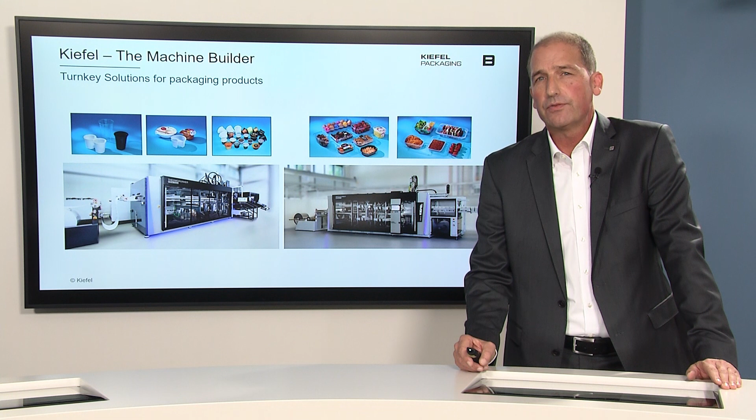Kiefel is a machine builder, but has developed into a complete company that can offer not only machines, but also tools and material development, product development. On the machine side, there are two sections we will touch today: the tray machines and the cup machines. Both have been developed into the .2 generation and are the state-of-the-art equipment that you can get in the market.

The Kiefel DNA, what does it exactly mean? We are on our way. Kiefel, when I started 16 years ago, built machines. In the meantime, as Kiefel Packaging, we can offer a complete system.

We have a site in the Netherlands, and Eric will give us an update from that side. And we also have one site in Austria where we do a lot of automation. Then we offer complete trainings. The ones that joined the Dialogue Days last year, it was fantastic to show also the apprenticeship system we installed at Kiefel. So it is the complete journey of the machine, of the life of the machine. From the day you buy the machine until you sell the machine, we can completely guide you and help you in all these stages.

Tray-to-tray recycling. Let's assume we have made trays, PET trays, on a Kiefel KMD Speedformer right now. And now the question is, we have a nice steak, we bought a nice tray with a steak, we grilled that steak of course on a Weber grill, and then I have the used tray. So I put it into the bin. What happens to this tray, Andreas? Can you please give us the information on what can be done with the tray? Please.

Now, these are the ecological advantages of recycling. So what does that mean for us as an industry, in the plastics industry as well as in the packaging industry, is very clear.

We really have to come together and close the loop in PET recycling. This is the final vision: one circle, which is bottle-to-bottle recycling, as well as a second circle of tray-to-tray recycling, have to be able to go into each other material-wise, input-wise, quality-wise.

In order to manage what bottle-to-bottle recycling is already doing, we need to look at trays and how we produce them, because attention needs to be put into how they are made. So what are the prerequisites for true recycling of a tray, or to create what we call an eco tray? It's actually four points.

We need to create recycling streams, first for transparent trays, then maybe for white trays, for example dairy packaging, and one for CPET. This is important because each of these have certain quality properties which would be diminished if mixed into each other.

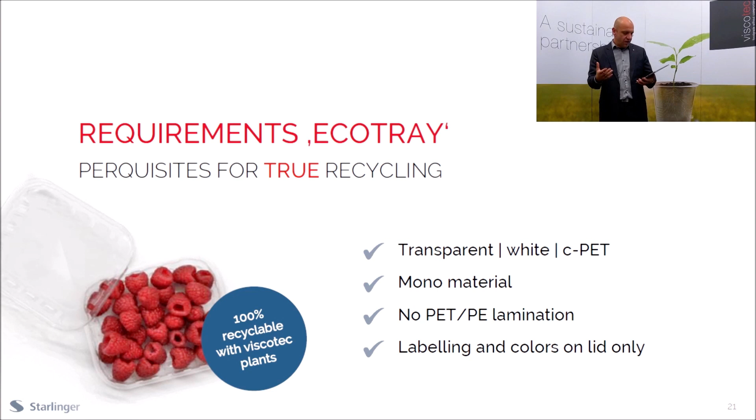So this is how the tray should look. Now I would like to show you machinery where input tray flake is made back into a sheet for thermoforming. How could that look like?

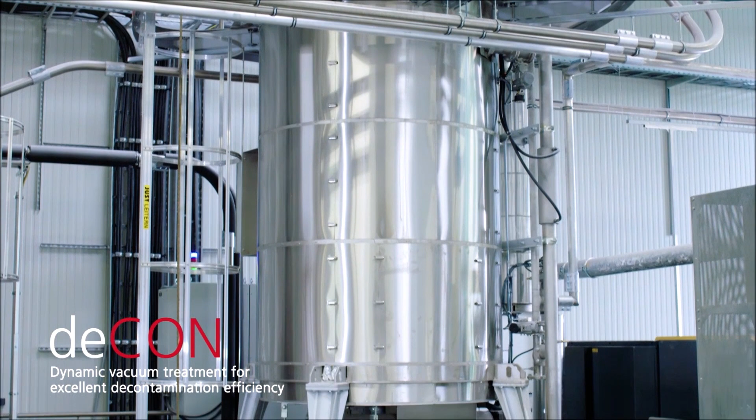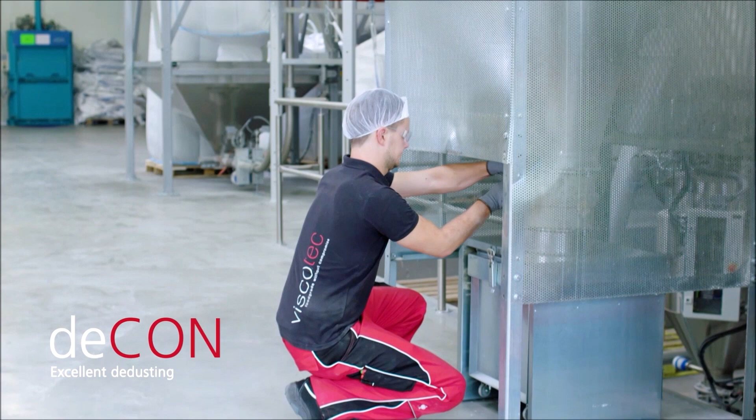In this first shot, you can see a decontamination dryer. Here the post-consumer recycled flake is transferred into 100% food grade flake in this super cleaning process. We're also extracting all the dust from the tray flakes, which is very important because dust has a huge impact on the sheet quality of the thermoforming sheet.

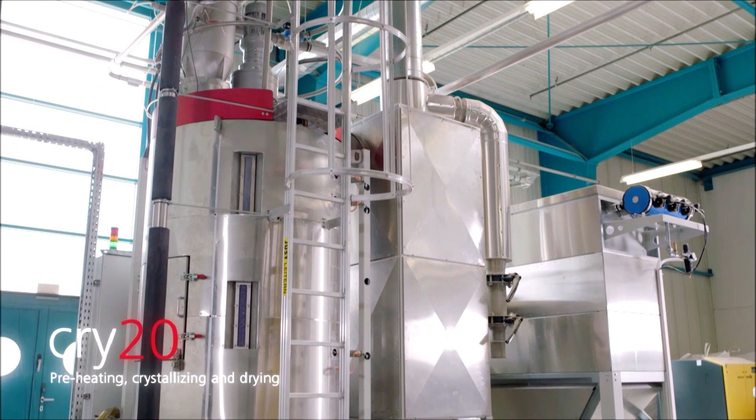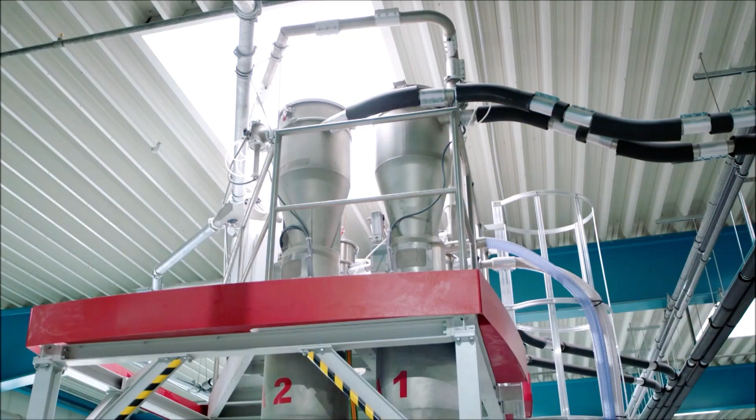Also, pre-drying of other input materials like in-house waste makes a lot of sense. This is why we created crystallizers, which again extract a big amount of the dust in these input materials to get a great sheet quality in the sheet line, as you can see in this shot. Here is the dosing system where the different input materials are received, mixed, and introduced directly into the extrusion step.

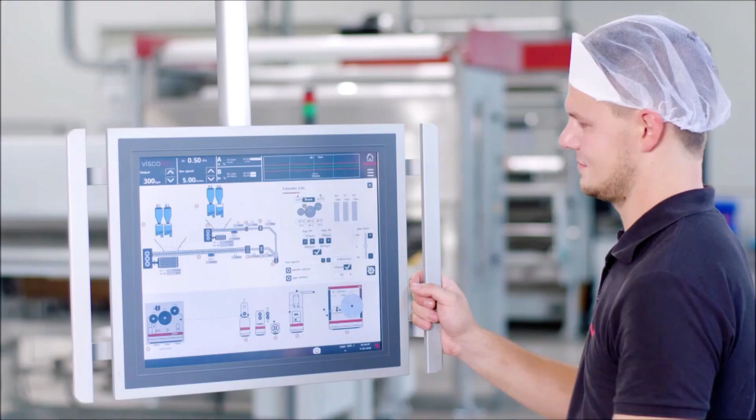This extrusion line has only one master control panel because we had in mind a very high grade of automatization, meaning a minimum requirement of numbers of operators. You can see everything is very intuitive and relatively straightforward.

What I also want to show you is this high grade of automatization—an automatic start. We have a counter here in the bottom right showing the minutes passing by as it takes for the operator to start the line completely by himself, from standstill to sheet.

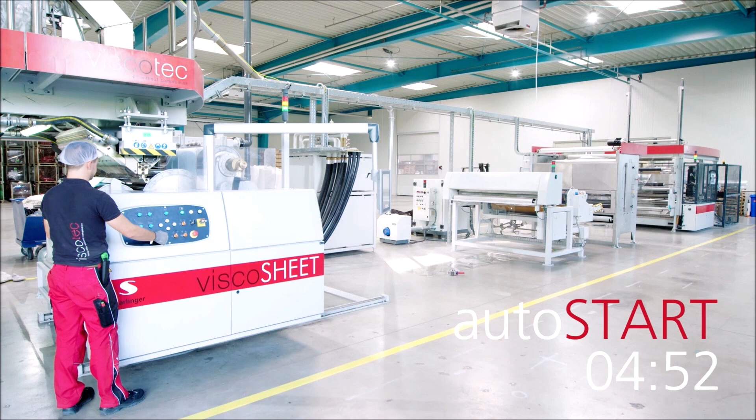You can see he's not moving around a lot at all. He's basically just pushing one button, and already by now he's fired up the extruder, the dosing system, the roll stack, and everything completely fully automatic by the push of just one button.

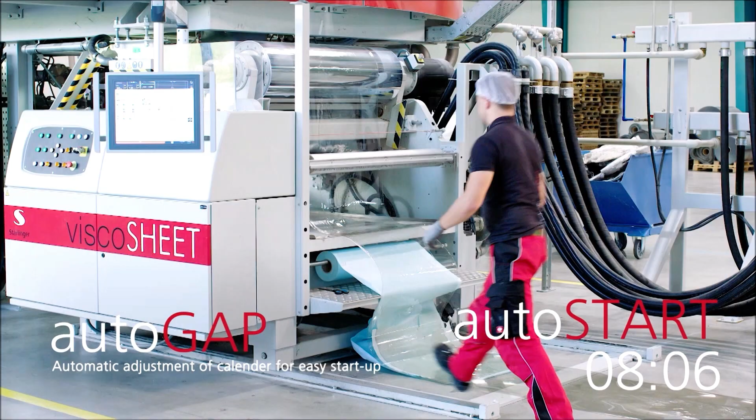He's now feeding the sheet into the rest of the downstream, and right now he's cutting the edge trim. That means we are adjusting the sheet to the desired width, and that was done after about 12 minutes into the process, and already the machine is running commercially viable sheet.

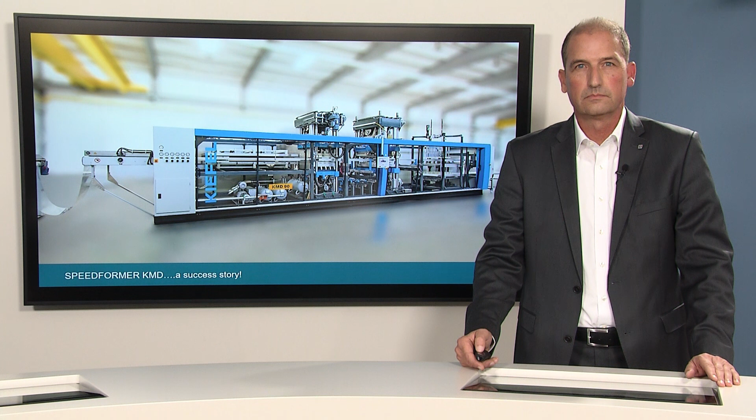Thank you, Andreas. I have to say, really nice equipment you make in Austria. And there is a lot of film coming from your Viscotec systems. So who can handle all that film? I know the answer, and you probably know the answer.

You can divide the market into two segments, one is food. There are a lot of applications, trays for meat, trays for vegetables, so all kinds of applications that are known, but also the non-food applications. In the meantime, thermoform products have become very difficult, very complex. So in certain areas we can compete with injection molding, and that makes a thermoforming machine even more reliable and attractive.

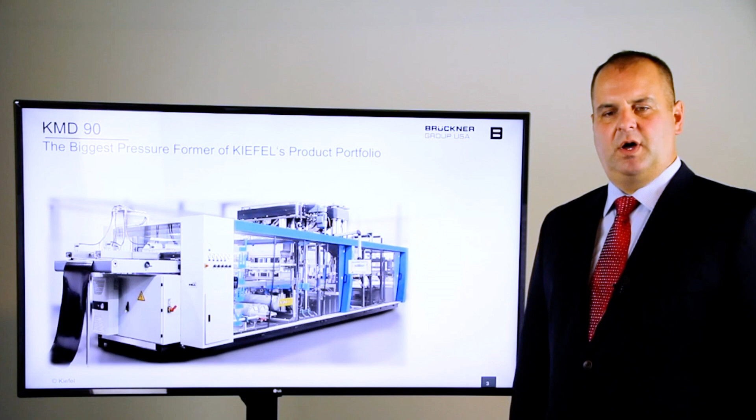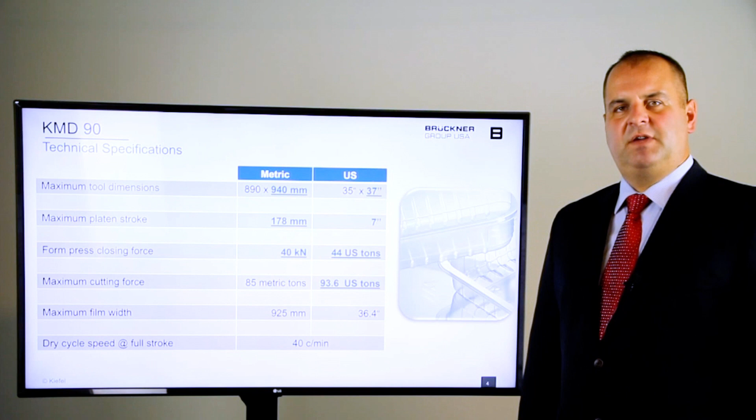KMD90 is the largest format machine Kiefel has designed, done after extensive market research in North America. The machine is able to fit most existing steel rule tools on the market. The KMD90 is the first machine designed with a longer index up to 37 inches to accommodate the local tooling technology. The way tool changes have been done over the last 50 years has been improved with this most recent design. Other changes to the Kiefel standards included longer platen strokes and higher tonnage for cutting. Pictured is a 3-station KMD90, which you will see a demonstration of later.

Distribution is key. Having the flexibility for a third motion plug on top as used in Europe and on the bottom as used in North America is a must to survive in the thermoforming world of the future. Process control is more possible with these new technologies. The most important aspect is to maintain a constant sheet temperature, and Kiefel does just that with a closed loop heat control. CAT, or Computer Aided Technology, is the software package of the future.

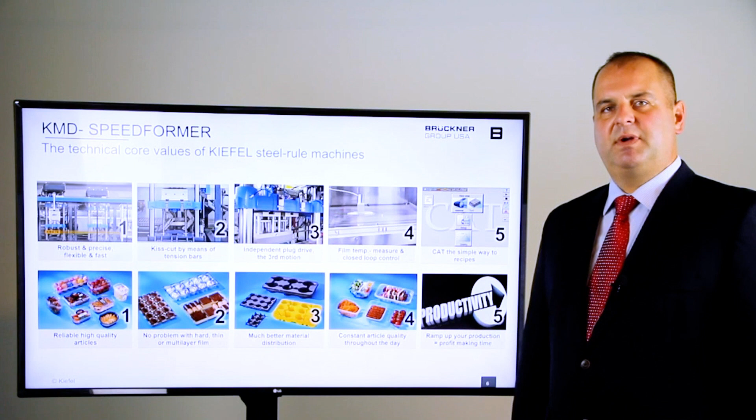Thermoforming experts of yesterday are retiring, and a new generation is taking over. This program makes it easy to develop and run tools and products. It also enables less experienced operators to seamlessly step in and run the KMD90.

Our forming station is the heart of the KMD90 machine. The KMD was designed with robust and full-size platens to limit deflections as well as a center servo-driven toggle system. The independent third motion drive available on both platens and independent clamp frame drive provides the highest flexibility in the thermoforming process. With a given clamping force, the forming process can be enhanced with pressure forming up to 72 psi.

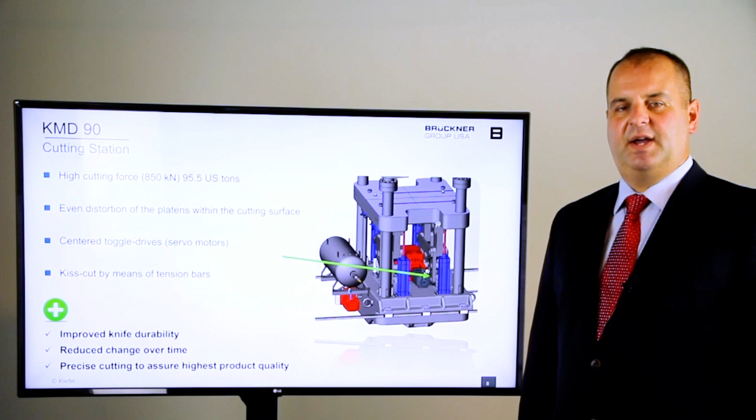Our most valuable selling point is the cutting station. We distinguish ourselves from the competition by offering a precise and robust cutting station. Controlling the cutting process using servo technology and our unique tension bar design extends the tooling lifetime and provides a repeatable process, which is critical.

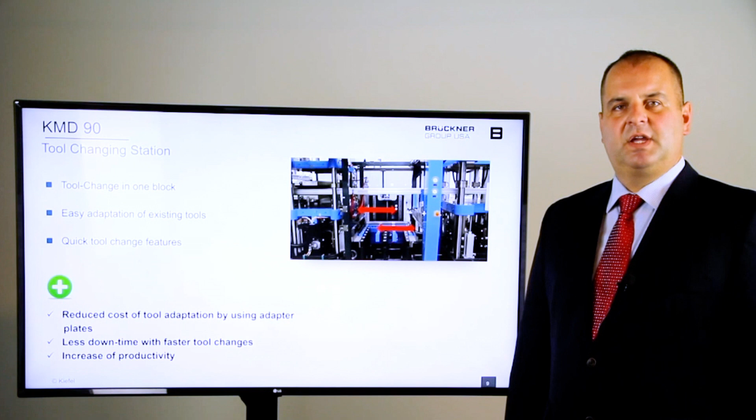Another unique design of our KMD90 is the tool change system. Loading the tools into the machine at an ergonomic level onto a lifting table makes the tool change look easy, together with incorporated tool change features to make the tool sliding, centering, and locking faster and more efficient. Convenience is another added value.

A lot of products produced on the KMD90 require hygienic and sterile conditions. This is where the KMD90 works well with many features, making it a very sterile machine. Clean servo technology is the foundation, but there are other additional features to prevent contamination and angel hair. We spent a lot of time researching angel hair elimination, and as a result have integrated features using heated cutting tools and our servo control to reduce this type of contamination.

Our customers have been able to reduce cycle time when converting tools to the KMD90 by 20 to 30%. The quick tool change feature means more available production capacity. The downstacking or pick and place options available on the KMD90 provide a counted stack of products at an ergonomic level, thus reducing packing labor.

Down gauging using the third motion plug assist can reduce the weight of the product and still maintain the mechanical properties. All of these points add value and make our customer more competitive in the global marketplace, which is our ultimate goal.

A PET meat tray will now be demonstrated on our KMD90 located here in Portsmouth, New Hampshire. Our adapted tooling performs at a 25% higher cycle rate. I will now turn it over to Fabio for the demonstration.

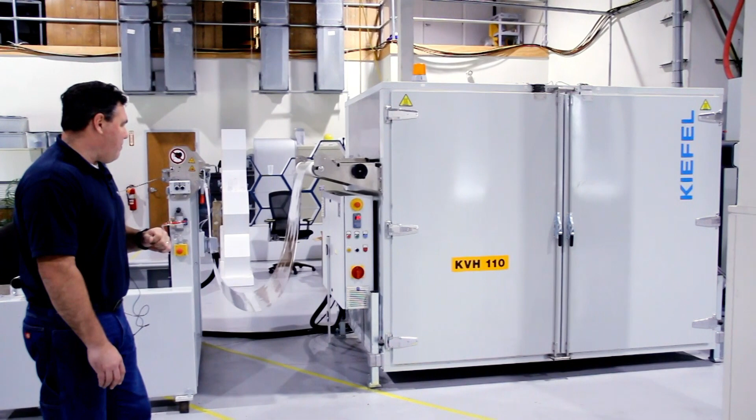The preheater is not being used for this demonstration. We are running APET. The preheater has temperature controls for standby and run mode.

From the preheater, the material progresses onto the in-feed table. The in-feed table has manual controls for width adjustment, as well as manual controls to feed the material in or pull it out of the machine.

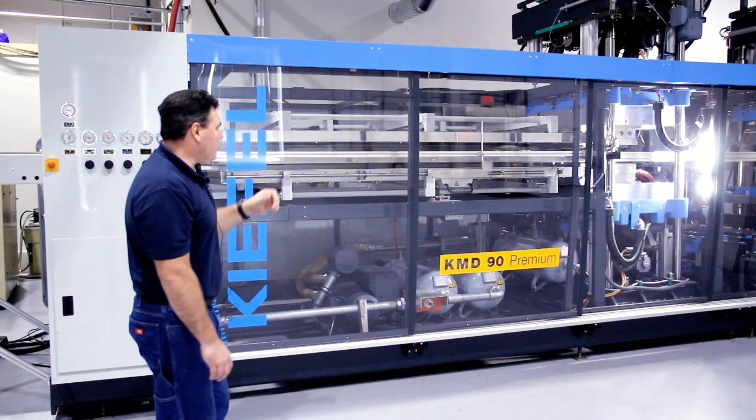From the in-feed table, the material progresses onto the chain rails. The chain rails are cooled in the oven section, and they contain automatic adjustment of the width of the material as it progresses to the stations. In the oven section, this oven is built with ceramic heaters. The lower oven contains screens for protecting those heaters from any plastic that may end up on them.

After the material is heated and spread, it progresses on to the forming station. On the KMD90 Premium, upper and lower stations are servo driven, with additional optional servos for upper and lower plug assist. In this case, we are not using the plug assist for this demonstration. Cooling for the tooling, vacuum and forming air come from the valve section of the machine.

The station after the forming station is our tool change station, for loading a tool onto the KMD90. The tool is placed on the tool loading station, and via a switch, the setup person can raise the tool and load it into the forming station or the punching station.

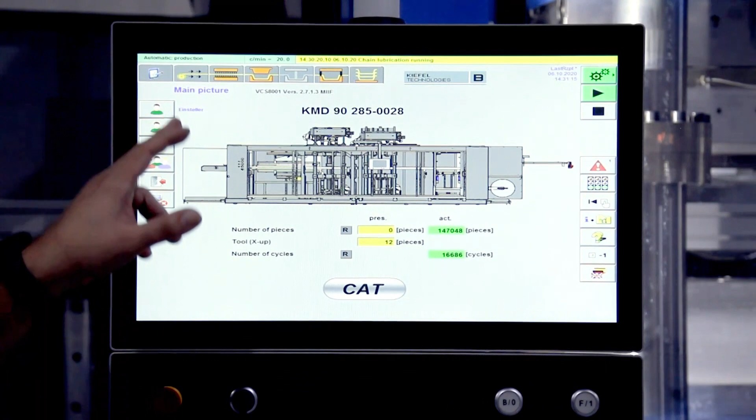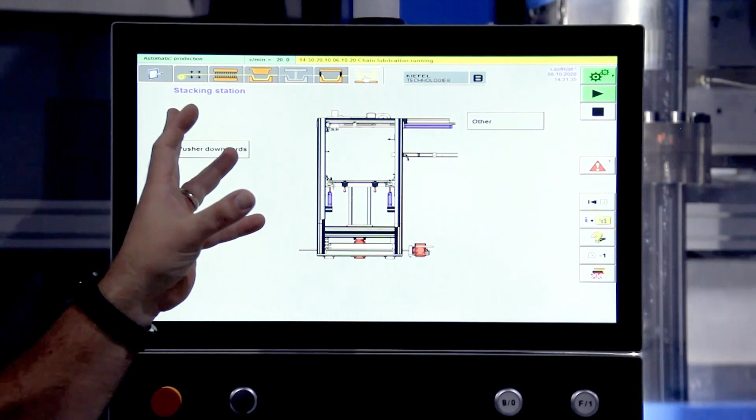The HMI on the KMD90 is a Siemens panel with a tab for each of the different stations. For example, the feeding or index system, oven controls, forming station, punching station, and stacking station. For each of the stations, you can easily access the manual function for the station by giving the button a second press.

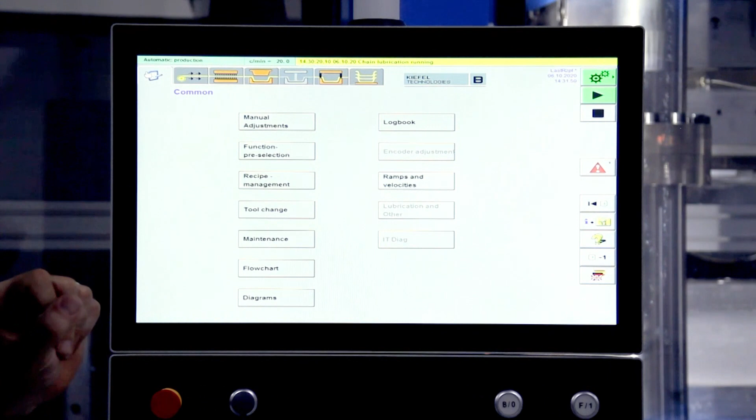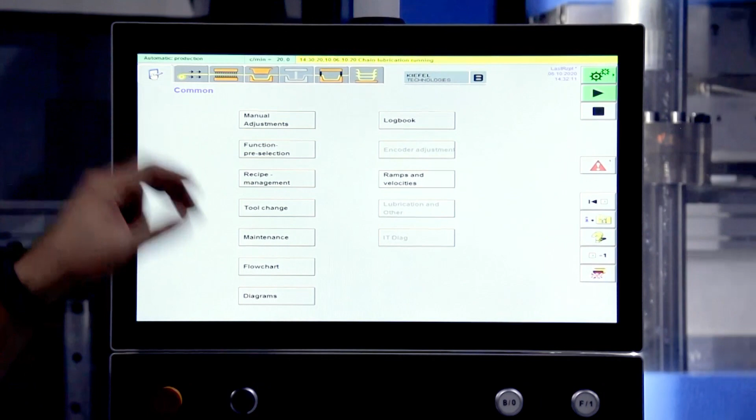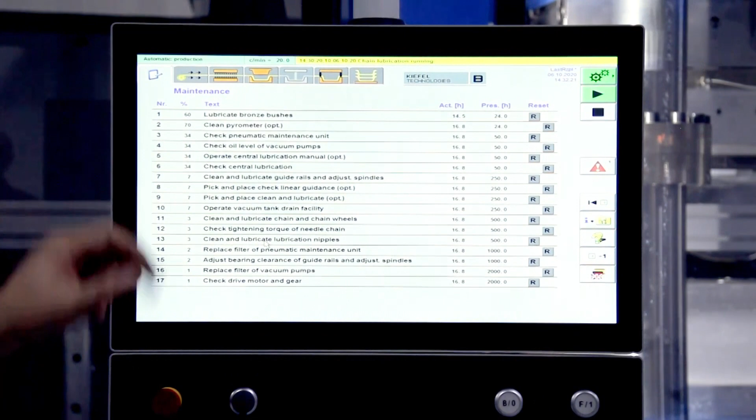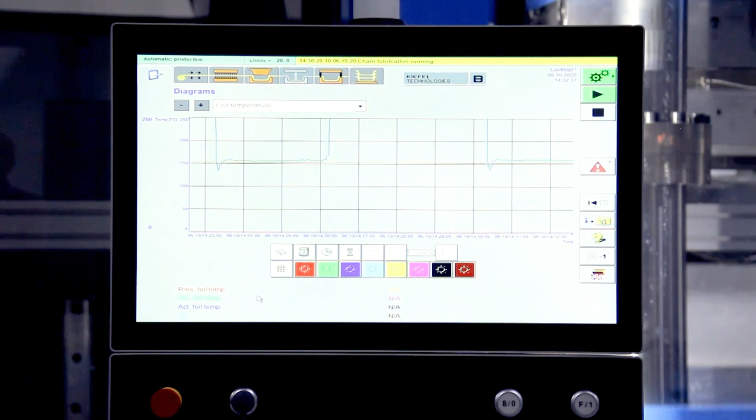In the common area of the HMI, we have function selections for the different functions in the recipe: recipe management, where you can select and load the different recipes, tool change sequence, maintenance sequence that alerts you when certain maintenance items come up on the machine and can be reset from this page, a process flowchart, as well as diagram for some critical information like sheet temperature, as well as other conditions or motor temperatures for all the different stations.

This screen also features computer-aided teaching, where you can select different materials and select different features of your tooling, and the machine prepares a recipe for you.

The punching station on the KMD90 is a precision adjusted station using tension rods on all corners of the station for precision parallel adjustment. The station is servo driven but air assisted for the weight of the tools. The station provides heating for the knives as well as fine adjustment for the cross direction adjustment, as well as turn direction of the knives, so they can be adjusted on the fly while the machine runs.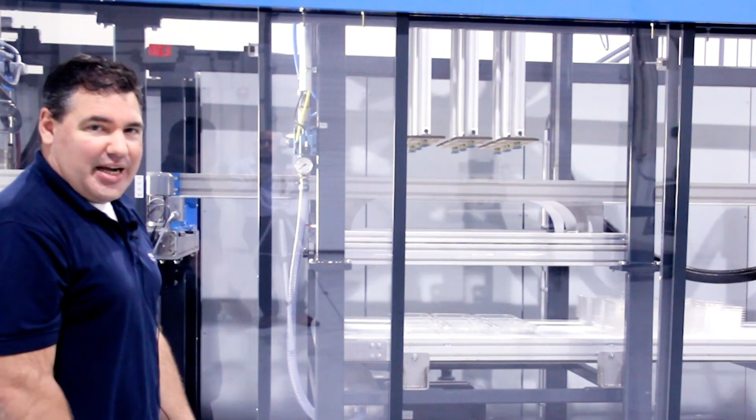The servo-driven stacking station is guided on the corners by linear bearings as well as direct driven by a rack and pinion system.

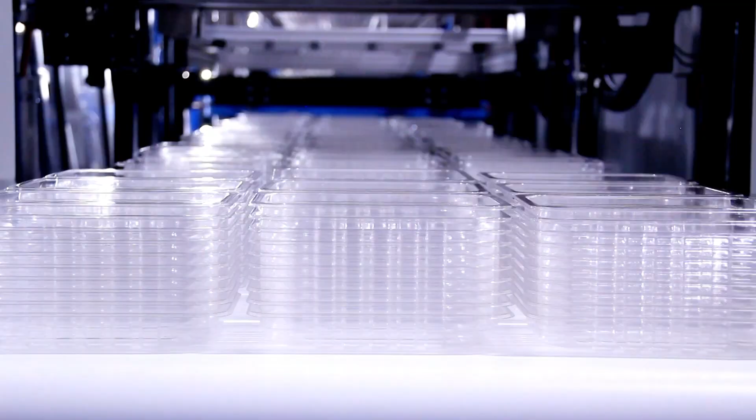Thank you, Justin and Fabio, for the great performance.

You could see the KMD90 speedformer running, making trays. Before we go into the cup world, we will make a sidestep and show you our site in the Netherlands, that is our technical center for material development and product development. And I would ask Eric to take over, please. Eric.

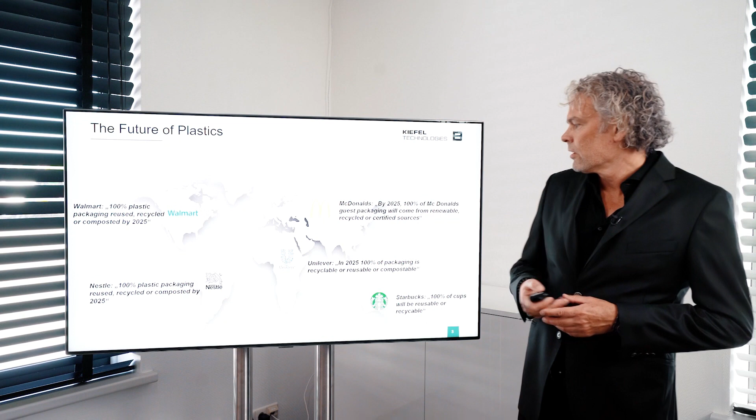Welcome to Kiefel Packaging Netherlands. We are the performance tool manufacturer and innovation center of Kiefel. Especially now that the demand for circular products is growing by the day, innovative solutions are the key to success. You only have to look at the biggest brand owners to see in what direction we're heading. For instance, McDonald's states that by 2025, 100% of their guest packaging will be renewable, recycled, or from certified sources. Unilever states that in 2025, 100% of packaging is recyclable, reusable, or compostable.

There are 3 tracks visible in the market with regards to optimizing materials. First track is based on polymers. Here you see that a lot of polymers are replaced by others which are more environmentally friendly. For instance, polyester is the material of choice for many products, and it's going to replace other materials which are currently used. The second track which is visible is bio-based material. For instance, a large hotel group is replacing their plastic cups by PLA cups. And the third one, which is quite new, is the fiber-based materials.

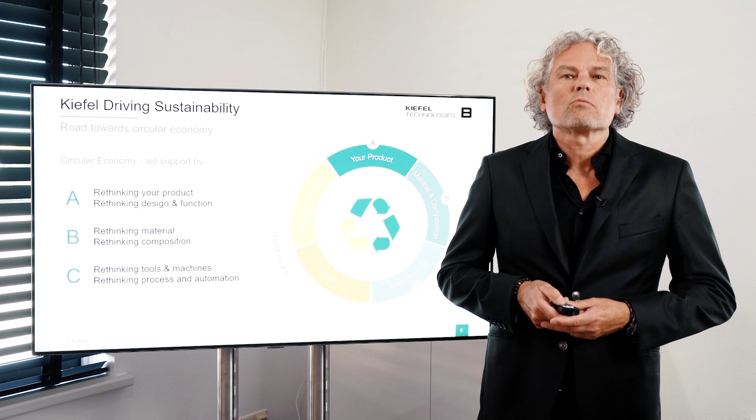At Kiefel, we meanwhile build up expertise to produce fiber-based products. But we also rethink composition with you. If you, for instance, have multiple layers in your packaging material, we can help you with making it into a monolayer material. But we will also focus on the impact on your machines and tools. If you, for instance, want to switch to bio-based materials, you need to adapt your process. The same goes if you want to use a high percentage of recycled materials, your process and machines will need to be adapted. In other words, together we can make your products recyclable, reusable or compostable, and we will support you in all the steps of the process.

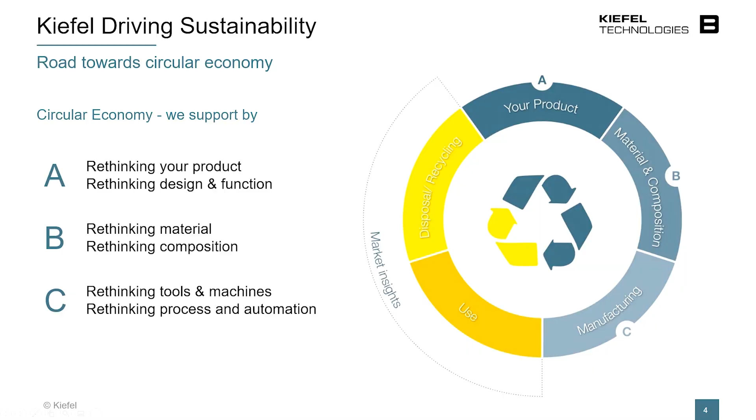In order to do so, we don't only have our tool manufacturing and thermoforming center, but also our laboratory, and this is where all the magic happens. Marius, would you be so kind to show us around? Of course, please follow me and I will show you around.

Welcome in our laboratory. Here we are working on new product development, working on process improvement and on troubleshooting. In the laboratory we have state-of-the-art equipment for this cause. We can analyze the material properties with our DSC and TGA. We can also analyze mechanical properties like the impact or the E-modulus. We can also measure barrier properties, for example oxygen or water vapor. We can also do computer simulations to check product properties. Besides those analyses, we have much more possibilities. But perhaps it would be better when I explain that based on a few examples. Take for example this yogurt bucket.

In the market there is at the moment an increasing pressure, especially from retailers, to downgrade the product weight, even up to 20%. That's not easy normally, but especially when you're already at your limits, it's even more difficult. Look at this cup - this is an injection molded bucket.

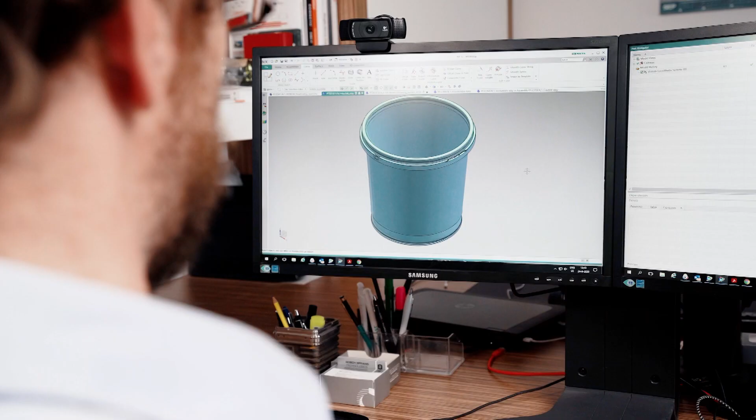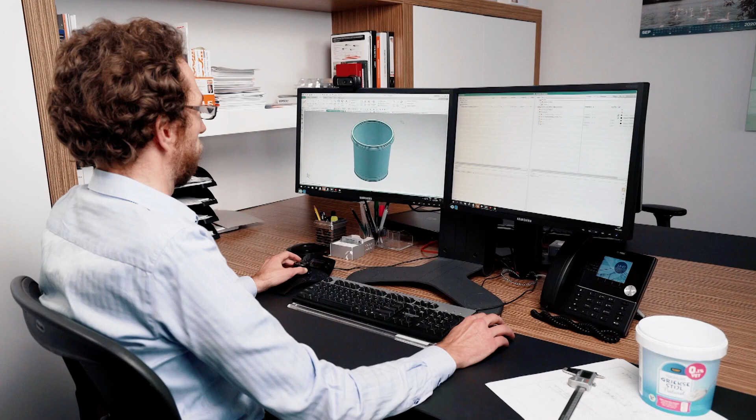We will investigate whether we can produce this product with thermoforming. How do we do that? First, we start with investigating the product features, the material and the product properties. We use reverse engineering to find out how we can make the cup with 20% less material. During this investigation, we check how the tool should look to create the specific product features, for example a certain lid fit or a tamper evident.

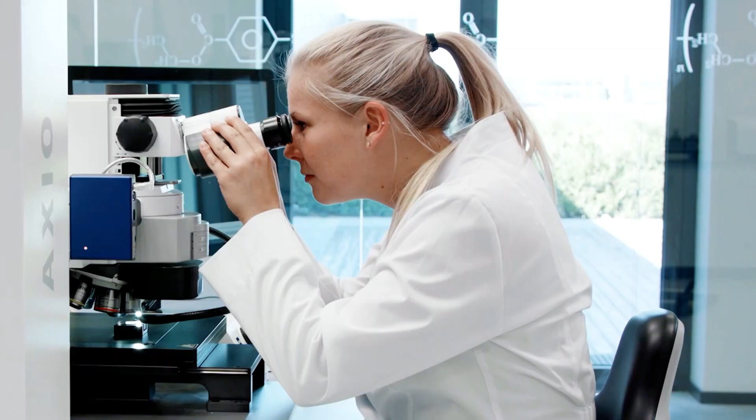As soon as we have the idea how to do it, we make a test tool which we run on our thermoforming test center. As soon as the products are ready, they are analyzed in the laboratory on material distribution, but also on the special features like the lid fit or the tamper evident. If the product is 100% to your satisfaction, we can start engineering and producing the production tool. When a production tool is delivered at your site, you get support from our service engineers to start up your production.

Another nice example is this CPET light cup from 100% recycled PET material. Because of the changing European legislation, there is more and more attention for using recycled material. However, you can imagine that using more recycled material has a huge influence on the process and the final product properties - and that is exactly where we want to support you as customer.

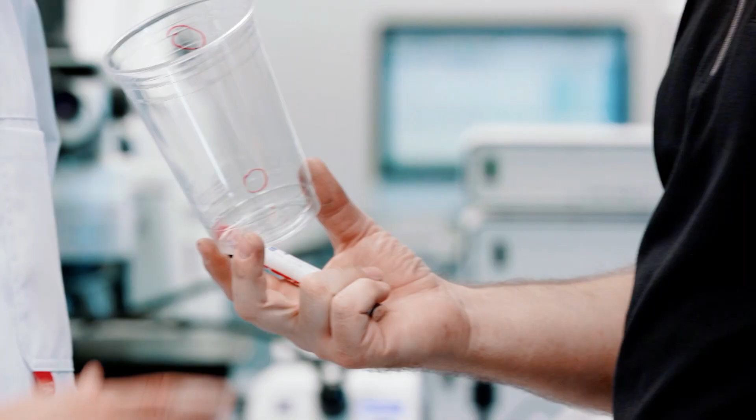Just as an example, we had a customer who had problems with the cutting behavior of his polypropylene capsule. We analyzed this material and found out that there was far too much polyethylene in the material. We solved this problem together with the material supplier by using another type of master batch.

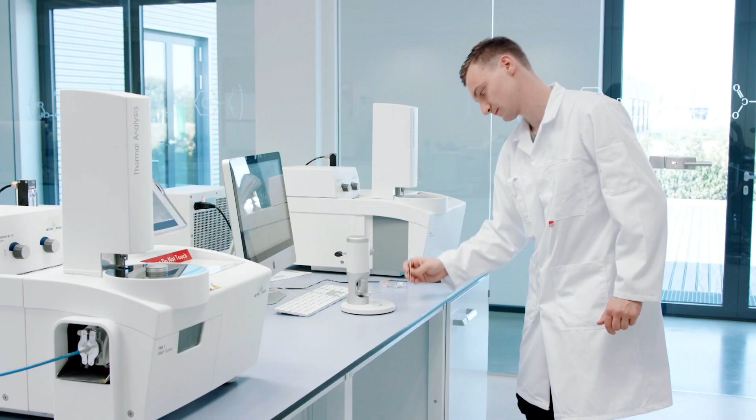But let's go back to the CPET light example. This is made from 100% recycled PET, and PET is the ideal material to realize the circular economy, because with the right pre-treatment, the PET can be used for food-safe applications again. This PET cup is produced in our thermoforming test center with 100% recycled PET material, which is prepared by Starlinger.

Because of the right tool development, material development and process development, this PET product is heat resistant up to 100 degrees, and therefore it can replace existing polystyrene products in the market. I show you this example to show that with the combination of these developments internally, together with collaboration through the value chain - in this case with Starlinger - we can find solutions for existing and new markets. So in other words, if you have to do something with recycled material, please let us know. We will be glad to help.

From 2021 onward, there will be a ban in the European Union on expanded polystyrene. Therefore, we get more and more questions from our customers for alternatives. Together with SML, an Austrian extrusion company, we developed two solutions. One of them is polypropylene foam - a safe alternative with no compromises on recyclability. Depending on the market where you are operating in, PET foam will be another solution.

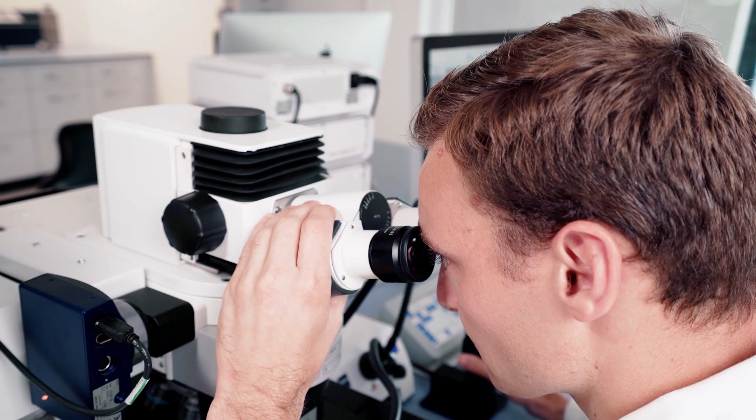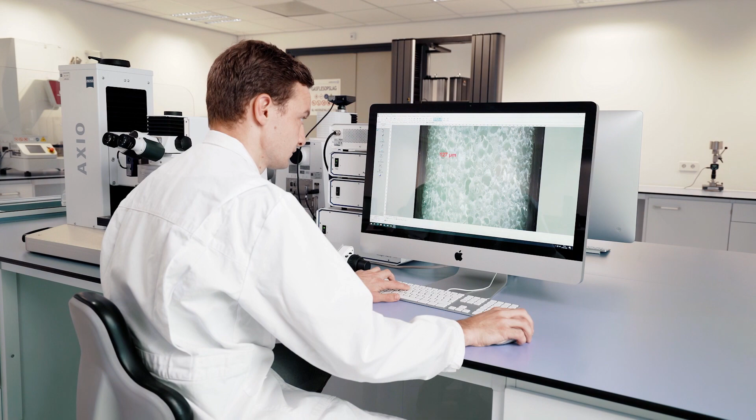Together with SML, we focused especially on the foam structure, because during the development project we found out that the foam structure has a huge influence on the thermoforming process, but also on the final product properties. Therefore, the foam structure is heavily investigated during this project.

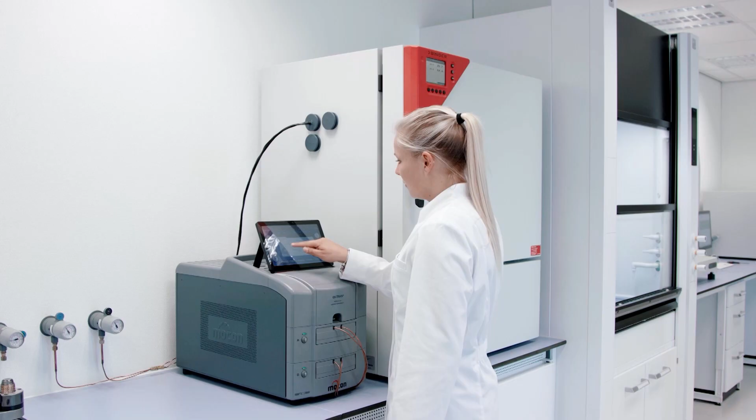Besides our efforts on recycled materials, we also have extensive experience with alternative materials, for example biomaterials, fibers or other types of paper. That can really be a solution when products are hard to collect or hard to recycle - for example this coffee capsule. We are developing this coffee capsule from a biomaterial. Besides the barrier, there are a lot of other challenges and challenging product features which have to be incorporated in this product, and therefore this is one of the ongoing and exciting product development projects we have.

Unfortunately, we could only give you a quick impression of our research facilities. There's a lot more to talk about, because every product has its specific challenges. If we can help to make your product better, lighter, stronger or more sustainable, if we can help to make your process more efficient, or if you need a thermoforming tool that fits all your needs, let us know and we will support you.

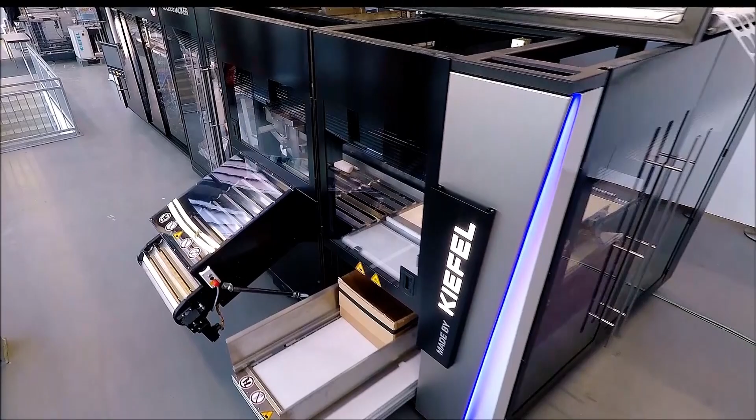Welcome back. So I hope you enjoyed the video of our KTR 5.2 speed.

Welcome back. I hope you enjoyed the video of our KTR 5.2 speed. Especially for you in the US, I heard from Justin that we have the American dream, our KMD 90. We also strive to make the KTR 6.1 a little more powerful and bigger, so we go for the KTR 6.2, our next generation in the 6 size. We want to be faster, stronger, and of course ensure you more output.

In our main drive, we also have a new system. We made a new design of the column discs and the main drive, now direct. All these improvements result in less maintenance, more power, and no bearing clearance. And we are listening to you.

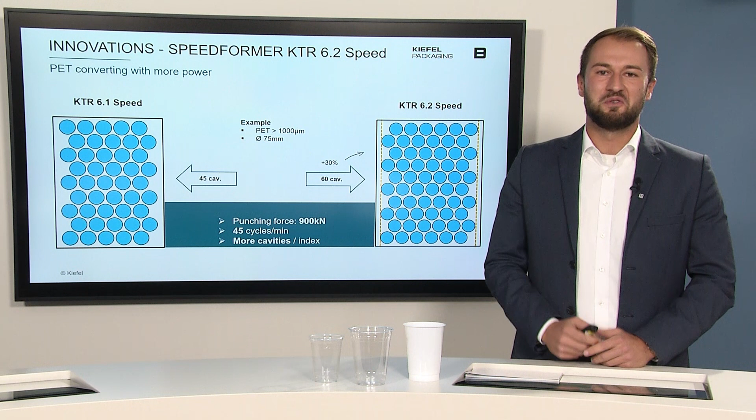Not only the main drive was improved, but also the forming area, as I mentioned before. On this slide you see the comparison between the KTR 6.1 and the KTR 6.2. For this example with a PET cup, we have 30% more cavities on the 6.2, which results in more output at the end of the day. I hope you will enjoy this machine as much as the 6.1, and we look forward to bringing it into your market.

From the forming station, I want to move to the heating station. Similar to our 0.2 generation of the KMD, we made improvements in the heating station of our KTR. Together with our supplier, we developed a new isolation and a new setup of the ceramic heaters. Our target was to bring more energy and more heating into the core of the foil, and into the foil in general, with less energy consumption.

This is also sustainable, and we tried to lower the machine costs, not including material. Here you can see a short breakdown concerning only the machine costs: investment costs, energy costs, labor costs, and tooling costs. About 30% are energy costs in your production cost, and we wanted to decrease this. With our new heating elements, we can set a new standard and bring these costs down by 10%. Together with our supplier, we made a big step into the future.

On the next slide, you can see the cooling. Cooling is also a main part of the process. Sometimes we can go faster, but the limitation is the cooling, because we need the cooling time for demolding, also for the perfect product quality.

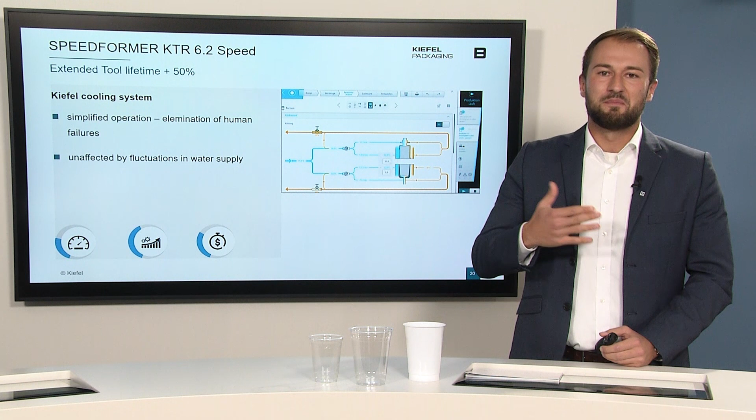So one other big step was the tool change. You know, it's not so easy if you go for a 6.1 or 6.2 machinery to change the tool. So we have now made a new yoke system where it's easier for parallel adjustment and to bring the tool in and out of the machine.

So now the space required for the operator is less than before, because now we have a remote control where the operator can handle everything from the front of the machine. You don't have to go to the operator side to the panel. So all the necessary things regarding the remote, the tool, or also tool changing arms are now in the front, so less space is required.

And of course, it's better for production. We want to save production time and bring you more output in the end. So this is one thing we tried to speed up, and therefore we are now faster. We can now handle a tool change in under 60 minutes. So we save more or less 30 minutes of the tool change, and also 100 hours of production time a year. This improvement is regarding our new yoke system, and thank you to our engineering that we can offer you this solution now.

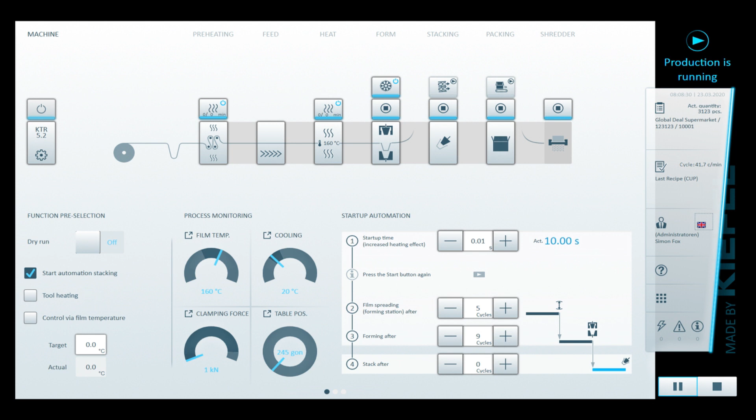And then we can see how we stack the cups. So there's also included the stacking of the cups, and later on, after we stack these cups, we bring it to the carton box. And the last button is the shredder.

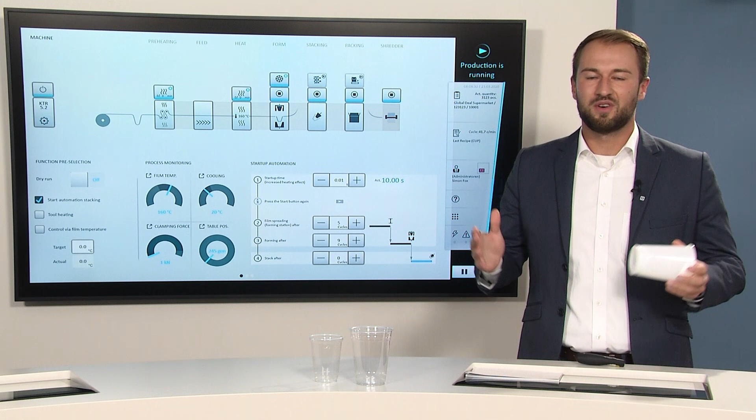As Thomas and the guys mentioned before, we are a turnkey partner. And therefore, we of course try to bring all our components into our HMI so that one operator can handle all these things from one HMI, one panel, and doesn't have to go to the different units.

So further on, I want to go with you into the automatization world. Here you can see our KTR 5.2, which was launched in 2019 at the K-Show. Our automatization is invented and improved in Kiefel Packaging Austria. So our subsidiary in Austria is the expert for automatization.

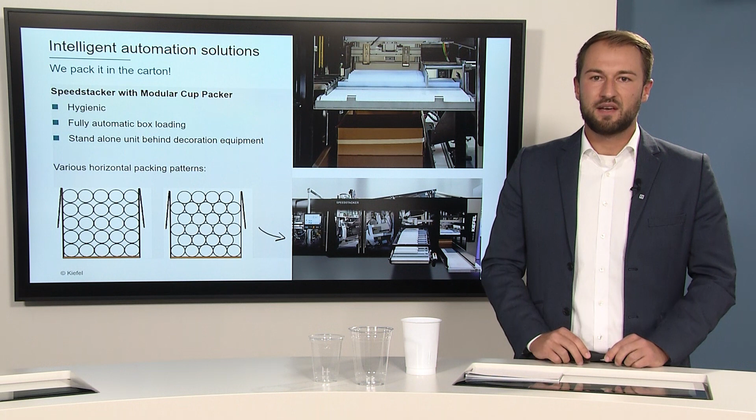And what do we have in our automation? Here you can see the speed stacker combined with the MCP, so-called modular cup packer. The speed stacker, formerly known as pickup stacker, is how we stack the cups. We stack the cups into our basket, and after we stack our cups, we want to bring it to the carton box. So this is a solution where it's all in one unit together.

Also, we have a standalone possibility. So if you want the MCP after a decoration or printing unit, it's also possible to bring the MCP to this unit. So we have different styles how we try to serve you and what is your demand.

In general, I want to say, with these circumstances with COVID-19, it's important to think about automatization, because it's hygienic, nobody touches your cups, your products. And to make it a little bit clearer, I want to show you a video later on.

First I want to mention this is for the horizontal packing patterns, horizontal and not vertical. So in the video you will see the horizontal packing patterns. We have different, we can do different styles. Please get in touch with us if you have a special requirement. But first, let us see the video.

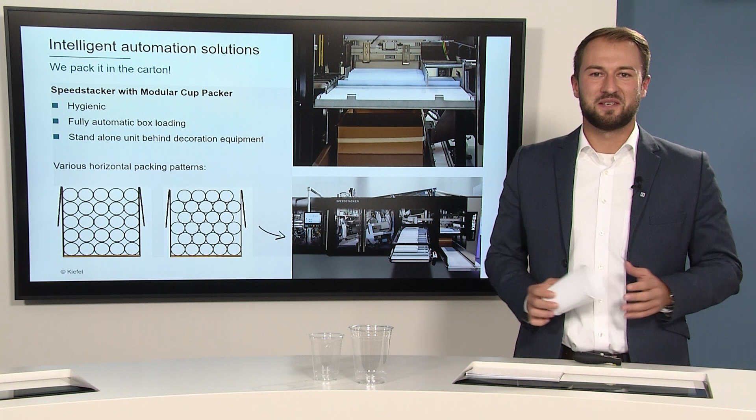Welcome back to me in the studio. So now you saw the horizontal packing patterns, the MCP. This MCP shown to you is regarding decoration or printing units. You saw Moritz infeeding the machine, and after the MCP it comes to the carton box.

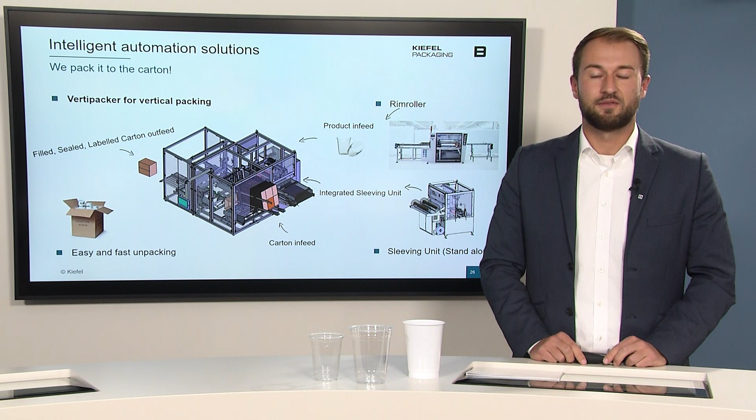So, horizontal packing. Now I want to go with you to the vertical packing. We have also invented a vertipacker. The vertipacker is especially for fast food restaurants, like McDonald's, Starbucks, however they call it, because the vertipacker has one big benefit.

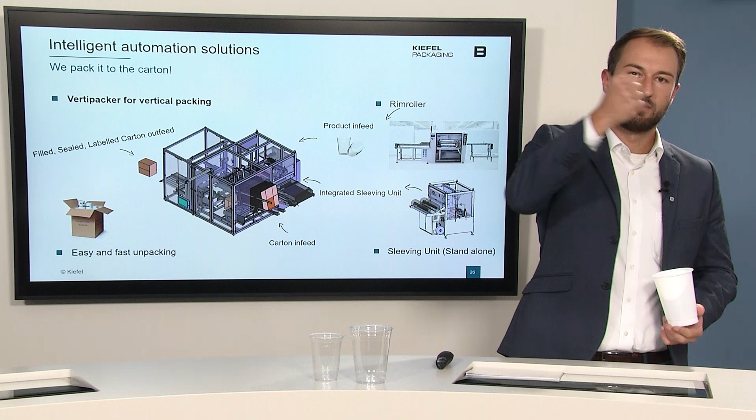The vertipacker is counting the sleeves. So first the product gets sleeved and then you bring it to the carton box, and the operator can take one sleeve out of the box, bring it to his desk, put it on the desk, the whole sleeve, cut the sleeve, and everything is in a row. So the vertipacker especially is in demand in fast food restaurants, and therefore we invented this new system.

Before I explain this unit, I want to come to the rim roller. You see the product infeed on the slide, and the rim roller is for drinking cups. So if you want a smooth feeling for your drinking cups, the rim has to be done by our rim roller. If you have a demand for this, we can of course serve you a rim roller, and please get in touch with us if there's a requirement or demand.

So now we have the product infeed on our slide, but also a carton box infeed. The carton box infeed is also used as a storage box. So we see carton box and product infeed. And in this total unit of the vertipacker, we have a sleeving unit included.

So we sleeve our stacks, our counted stacks, we sleeve it. After the sleeve, we bring it to the carton box. But this is not the end. After the carton box, we seal the carton box, we label the carton box, and if you want or if it's required, we also can palletize it. So this vertipacker has our best things in it and combines all requirements.

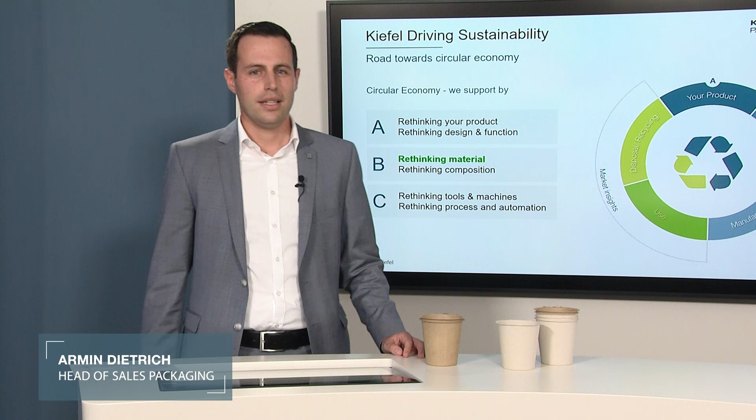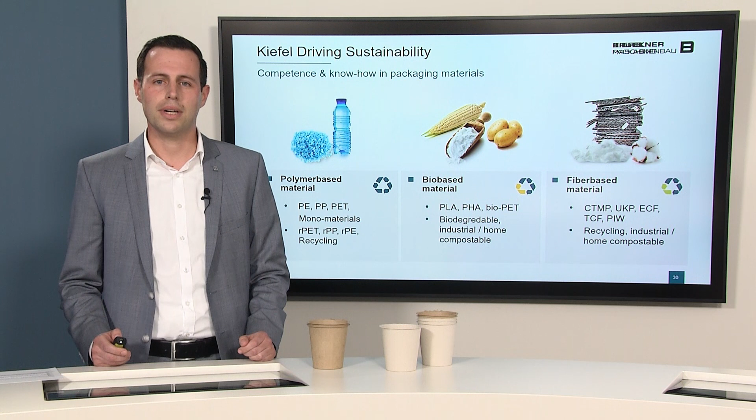You heard already a lot about the machine, the tooling, the automation, and how we are rethinking things. But I would like to dig a little bit more into the material side. As you know, Kiefel has been providing thermoforming machines for the polymer industries for many years. We also offer this for bio-based materials like PLA or PHA. But now I'd like to talk about our latest development, which took us 1.5 years to develop: thermoforming machines for the fiber industry.

But first, let's talk about what fiber is. Fiber is a cellulose material, made out of renewable paper, plants, sugarcane, or recycled waste paper. We have two different kinds of fiber. For food industry, we recommend you definitely use virgin fiber, since you have a high hygienic standard there, and it's necessary to use virgin material. But if you just produce transport material or packaging for other things, you can use post-industrial fiber as well, or sometimes make a mix of both with additives to suit your application.

Coming now to our machine, we've already sold it to Europe and the US. It's the KFT90 nature former. We have it available as a speed and a flex version, but that's way too much for today, so I'll just highlight the benefits.

We are using a robot there, and that's a really unique thing. It's very easy to maintain the tool because of the robot movements, and you can easily put the tools in and out - with the flex machine within 15 minutes, and with the speed machine making a tool change within 2 hours. So that's quite fast.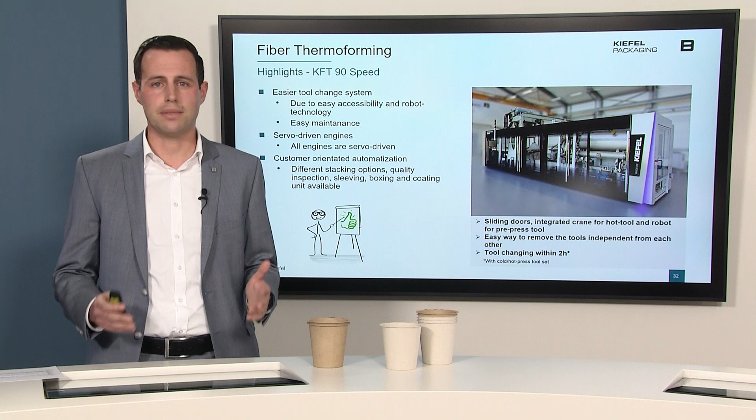On the other side, we are using all the know-how we have from the KMD world. This machine we've been selling for so many years, and 90% of the components are also used in the KFT machine, so it's a well-proven machine. There are all servo-driven engines inside, and the whole automation you have from the KMD world is also available in the KFT world - meaning packing, sleeving, stacking, everything you want, suiting your application.

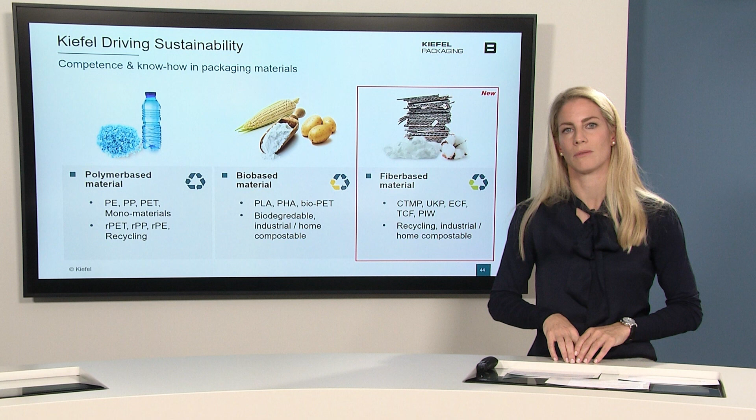We have the material competence for polymer-based material. So no matter if there is a replacement planned, for example PS to PP, we are the solution provider and we can support in that decision. However, we also have experience and our machines are compatible to process bio-based material. So no matter if you plan to have a PLA or PHA cup, contact us, we'll have the solution.

And finally, as was already mentioned by our colleague Armin Dietrich before, we have expanded our material competence. So you find now the fiber forming competence within our portfolio. For example, for food and beverage packaging, we have the solution here as well. And again, the solution is diverse and it always depends upon your decision. The point we would like to mention here is we have the competence, and no matter what decision you take, if you proceed with plastics, with polymers, with bio-based materials, or with fiber-based materials, we are the right partner for you.

Having said that, I would like to provide an overview of our projects and engagements that we are currently working on. First example, a customer project from the United States and Canada: recyclable coffee capsules. We supported our customer here to change from PS capsules to PP capsules. Within that, we found the correct density for sink float separation in the sorting streams.

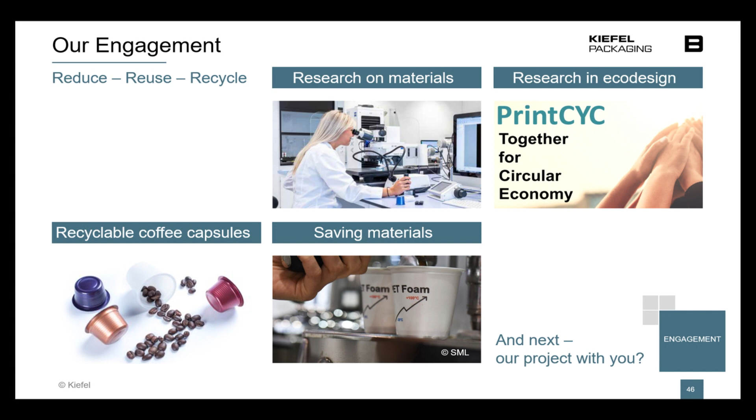Another example is the research on materials, as explained before. We work closely together, for example, with the Fraunhofer Institute in Munich and Zurich, to research, to adapt, to really understand the material behavior, what we have to improve, so that the material runs best on our machines.

Another example, which you might know already from last year's trade show, is the SML foam cup. The intention here was to save material up to 50%. So the joint research department from SML and Kiefel developed a system and a cup where we can save up to 50% of material.

And the fourth highlight I would like to mention is our PrintCYC project. Monomaterial packaging is often printed instead of directly being labeled. This is why we got involved, because we want to investigate the impact of printing inks on the recycling process, together with other players in the value chain. We already have the results of this project and they will be released soon, so stay tuned. These are very exciting news we're going to share with you in the coming weeks.

So this provides an overview, and we hope it gives you the feedback that we are the right partner for you. In the next three minutes, we would like to share our rethinking video with you, and after that Thomas Huber will be back to address your various questions that you've posted in the chat window. Take care and enjoy the video.